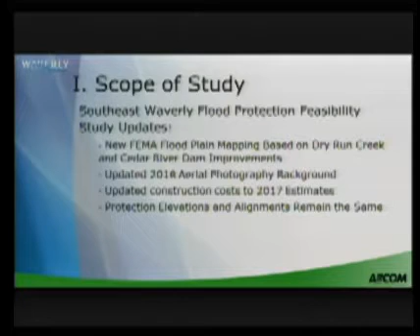So as Mike had said, we took the original study and updated it with the new floodplain mapping that was created based on the Dry Run Creek improvements that have been completed over the last couple of years, as well as the Cedar River Dam. Along with that, there was some updated mapping done based on topography downstream of the dam, which removed some areas from the floodplain and updated the floodplain based on the current layout of the land. So we wanted to update those figures, and that's what I'll discuss today.

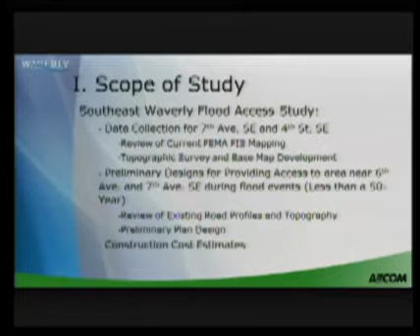As well as updating those figures, we put together a preliminary design for keeping access during these smaller flood events either through 7th Avenue Southeast or 4th Street Southeast. We gathered some information through a preliminary survey to get the existing elevations out there and reviewed those based on the new flood mapping to see what options we would have for potential road construction in that area. So just a refresher, the Cedar River mapping changed based off the dam improvements and the Dry Run Creek improvements.

And with those improvements, we also reviewed the protection levels that we had designed for in the 2011 study. The dam improvements were basically for upstream improvements. They didn't really affect the downstream flood elevations on the Cedar River. So what we had originally intended in 2011 protection levels, those are still current today. They match the current flood elevation levels that are out there, even though the mapping has been updated a little bit in that area based on topography.

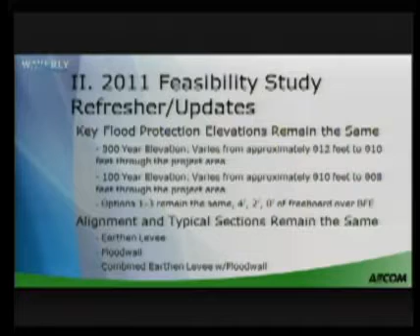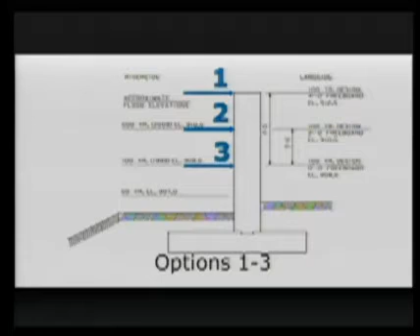The current flood elevations, the current alignments that were in that 2011 study are the same as they are today. We're looking at the same typical sections, which are earthen levees, either a flood wall or a combined earthen levee flood wall, where we have limiting right-of-way in areas like that. Just to go over again, we had the 3 protection levels that we looked at, which is the 4-foot of freeboard over the 100-year, the 2-foot of freeboard, and then option 3, which is essentially no freeboard over the 100-year elevation.

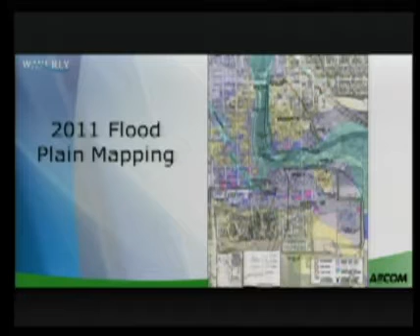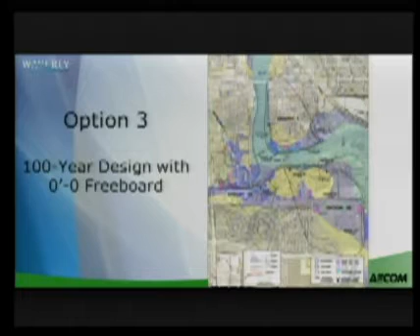So as part of the update, we also looked at bringing the cost from 2011 to 2017 dollars. And if we look at the comparison, on average, it was about a 40 to 50% increase from 2011 to 2017. This is just based on average prices that contractors have been bidding projects for since then, personal experience for those projects. So it's a significant increase from 2011 to 2017.

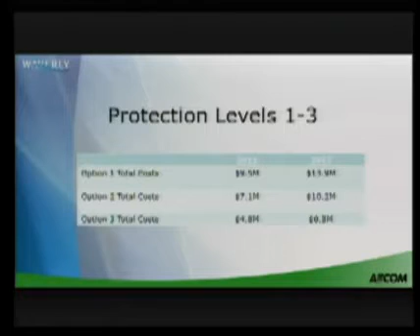Just to run through it, option one, which is the more robust option, is around $14 million, the planning level cost estimate for that flood protection option. If we go down to option three, we're looking at about $6.8 million. But again, that's a lot less protection for that option. So those are the updates that we completed on the 2011 study. As Mike had said, it's mainly dealing with the new floodplain mapping that the city has worked on between the projects in the area, as well as aerial mapping and then the new cost estimates.

One of the other options we looked at is access during these flooding events. We talked to the city, and the city has made us aware that some of these areas have a hard time accessing their properties during not necessarily the 100-year flood event, but even some of the smaller events, say a 10-year flood event or up to a 50-year flood event. And a lot of these access points are 7th Avenue Southeast and 4th Street Southeast.

So we looked at a preliminary design in those areas to see what we could do to provide access for these smaller flood events. As I mentioned, we're looking at a 50-year and less flood event. We're not necessarily looking at a 100-year flood event because that's a lot harder to access, and some of these areas are inundated during those events. The design is just based on existing profiles and a review of the FEMA floodplain mapping. The goal is to provide access for these smaller events and not leave any of the community cut off during those events.

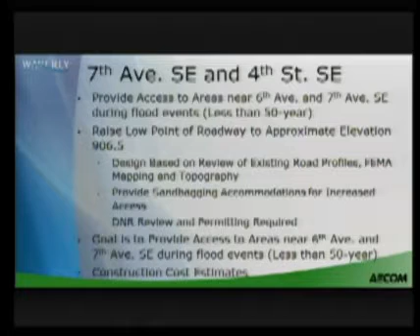This is kind of a layout of what we're looking at. In the northwest portion of the area is kind of where 7th Avenue Southeast is, and we'd be looking at raising that roadway. Currently, the sump area, the low area of that roadway, is around 904. We'd be looking at raising that up to around 906.5, which would be about a 2.5 feet rise.

By doing this, it would allow access for some of these smaller events. We'd also be looking at providing an area where if we got an event where the water surface is going to be above this 906.5, we could add a couple feet of sandbags north of the 7th Avenue Southeast intersection to increase the amount of time that we'd have access for larger events, up to approximately a 50-year event.

Now, we're also looking at a preliminary design of raising 4th Street Southeast as well. In this area, the flood elevation is approximately 2 feet lower during an event than it is in the 7th Avenue area. But we're still looking at raising this to about the same elevation. We just wouldn't require the sandbagging down in that area.

These are some recent floods, and then the 50-year elevations. If you look at the 50-year at top, the 50-year flow based on the FIS is around 34,000 cubic feet per second. That equates to roughly elevation 908.1 at the 7th Avenue Southeast intersection, the low point of the roadway.

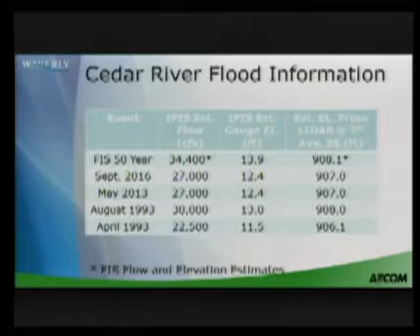And then you look at the August 1993 flood, that was around 908, and in April 93, that was around 906.1. So all of these recent crests would have put 2+ feet of water in that low area of 7th Avenue Southeast, cutting off access during those events. This is just more of a graphical representation of those events.

So this is elevation 907, based on the Cedar River flooding, the contours of the area and LiDAR mapping. You can see in the blue area up at 7th Avenue Southeast where it's overtopping the roadway for the elevation 907.

With our improvements, we'd be looking at raising that roadway to 906.5, but also allowing an area for sandbagging. So if it goes above that 906.5, we could put a couple feet of sandbags up there to still provide access to these high areas that you can see outside of the blue shaded area.

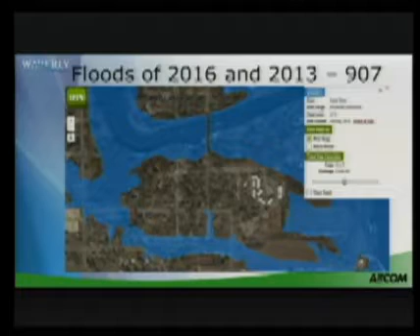This is just a follow-up of a smaller event where, if we went with the 906.5, we wouldn't necessarily need to have sandbags out there, and we'd still be able to access those areas during the smaller flooding events.

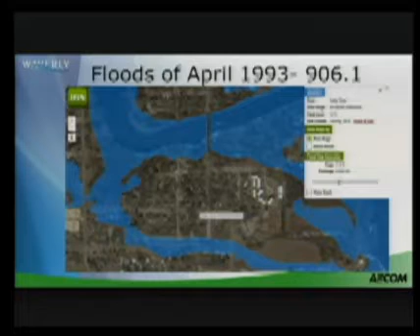This is the preliminary layout that we'd be looking at for the 7th Avenue area. We'd be looking at replacing about 600 feet of the paving to eliminate that low spot, that sump that's there now, and move it down closer to the First Street Southwest intersection. By doing this, we'd have a constant grade, so we'd put a couple new storm sewer intakes in.

We'd have some rebuilding of the sidewalk on the south side of the road, as well as a gate well structure that we could close during these flood events to still provide road access to these properties.

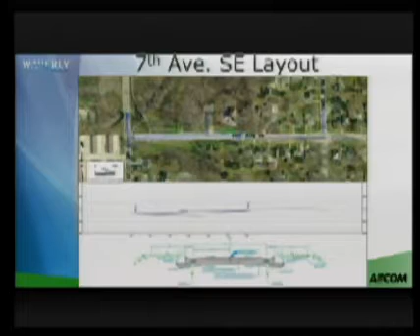4th Street would be a similar design. However, it's a steeper grade going in and out of the low point of 4th Street, so we would have less roadway to reconstruct in this area, just over 300 feet of roadway, and we'd still be looking at some additional storm sewer improvements as well as a gate well in this area.

Another option we added to this area would be connecting the 10-foot trail that is just south of the school to the existing roadway.

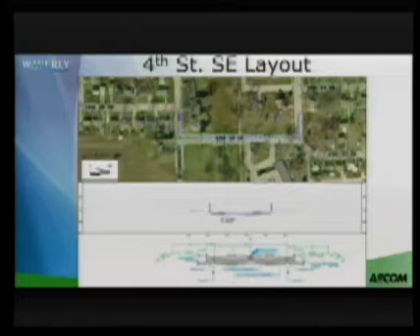Now we'll kind of look at the costs associated with each of these options. As I mentioned, 7th Avenue was approximately 600 feet of roadway. We'd be looking at about 330 feet of storm sewer, a couple storm sewer structures, raising the roadway, so you've got some earthwork construction in there, removal. It would be around $420,000 as our planning level cost estimate for that 600 feet of roadway and storm sewer improvements.

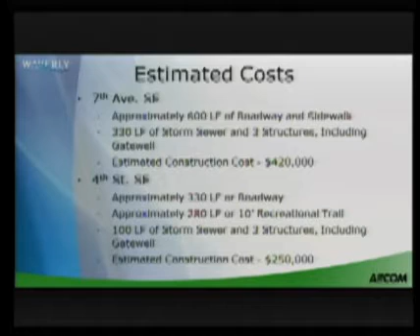And then 4th Street Southeast, like I said, we're about half the amount of roadway reconstruction, a little over 300 feet, 330 feet. We'd still have some storm sewer and about 280 feet of the recreational trail. Our planning level cost estimate for that option is around $250,000. So at this time, I'd like to open it up for any questions regarding the update to the flood study, as well as a review of preliminary design for access during these smaller flood events.

So if you close off 7th Avenue, that's flowing water during a flood event, correct? Yes, during a flood event, it's outside of the floodway, so it's not the floodway flowing water. It's in the floodplain, but water always finds kind of the low spot, so there is some flow that would come across that area. Right. So that flow goes across 7th Avenue. Yes. Yeah, if you block that off effectively to protect that downstream, what is that going to do to your level on the main part of the river?

Preliminary analysis. Now, when we go into final design, we would do some more detailed modeling of this. But given that it's outside of the floodway, which is kind of the reserved area that no fill is supposed to take place in, we're in the floodplain here. There should be minimal, if any, impacts to the upstream elevations, especially in the 100-year event, because what we're looking at is protecting up to like a 50-year event. So during a 100-year event, there's still going to be flow going over that roadway. That flow is still going to be there.

But since this fill that we're looking at is just confined to the roadway and in the floodplain area, not the floodway, the floodplain area is not the effective flow area per se, especially with the fill that's downstream of that area. Mike, with your experience seeing the water flowing across, do you concur with that? Yeah, as Dan indicated, when water does go over 7th Avenue, it's only a couple feet deep, while in the Cedar River, it may be 20 feet deep. So it's not insignificant, but it doesn't have a substantial impact.

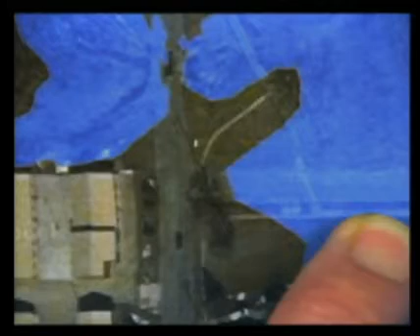So when we talk about sandbagging the north leg of the intersection, we would sandbag from like the corner of Ramker mini storage across the roadway. That's the extent of our sandbagging. So upwards of maybe 2 feet high for 50 to 70 feet in length is what we're talking about. And in doing so, we keep the water from going into Crestwood Park, and we maintain access into this part of town. So that was April of 93. We get to August 93.

It's now more substantial, but even with this one here, there's been some additions here at Ramker Mini Storage, and we now have the pedestrian bridge across Dry Run Creek. Sandbagging across would also provide protection from the August 1993 flood. You would be able to access it from the south and come up on 7th Avenue Southeast and access the neighborhood that way.

Then we get into the floods of May of 2013 and September of '16. They were very similar. This is showing the high water in Harlington Place cul-de-sac, and it was taken shortly after the water started to recede, but you can now pick out the debris line, so we know how high the water got.

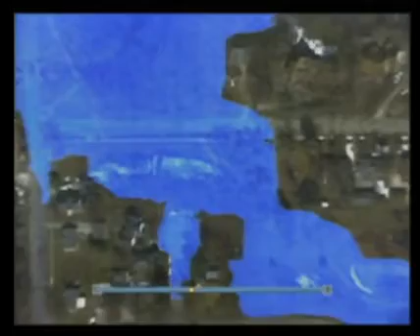Iowa Flood Center mapping. Again, we can correlate the elevations. Here's Harlington Place cul-de-sac, so we know this is a good representation. And then here being able to sandbag across over to the sidewalk on the northeast corner. Again, preventing the water from crossing 7th Avenue and maintaining access from the south and using 7th Avenue into the neighborhood.

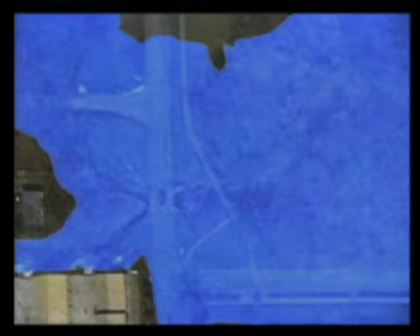How much available freeboard would you have before it would go into Ramker at that point? Ramker is, I think most of it is within 6 to 12 inches of the 100-year flood elevation. You see that straight line where that Dry Run that goes by the bowling alley comes out. At that point, I'm just curious how high between the water level and the level of the Ramker mini storage. 2 foot, 3 foot? So the 100-year cuts through the mini storage units. At that point where it transitions from purple to yellow, it's 0 depth, and by the time you move to the northeast corner, I'm thinking it's maybe a foot and a half deep.

So they're finishing up the report. It's good documentation. There's no action required tonight. Just want you to think about it, and if you come up with questions as we move into strategic planning and budgeting, we think that this is a project that warrants further consideration and discussion. When looking at the FEMA level flood improvements, $14 million, and there's maybe 30 homes that would benefit from that. So that's not going to have a favorable benefit cost.

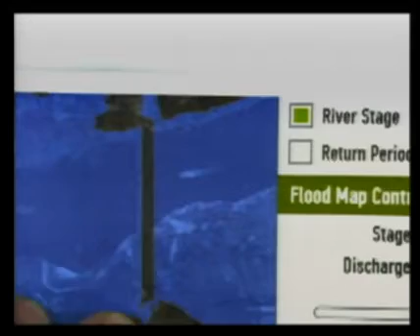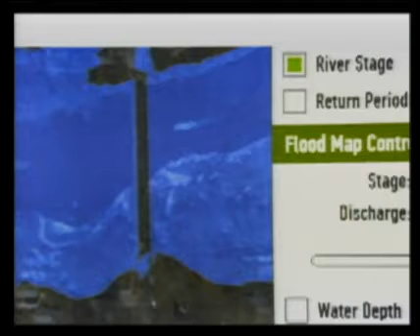So if there's a vehicle bridge there, this is again representing that August 1993 flood, which is right at a 50-year flood event. This is showing the existing truss bridge with a new vehicle bridge. These little areas on the north and south side go away because of the bridge approaches, an elevation change. So you would not need this. Which flood is this then? This is August of '93, which is representative of a 50-year flood event.

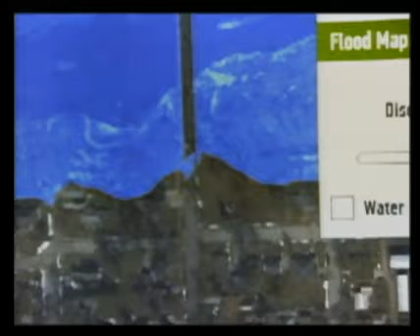Okay, now I'm going to switch back to the presentation, and this shows the purple is the 100-year flood. You can see that with Ramker, it's going to be very close. If the water's only a few inches deep at a 100-year flood, so if it's a 90-year flood, you probably still have vehicle access for certain vehicles. But that gets to be a tough decision then. At what point do you, in effect, close the neighborhood off and either mandate evacuation or encourage evacuations?

Because, you know, are you going to go a little bit higher? When is the crest coming? Is it coming at night? Those are all the tough, challenging decisions. So if I'm following correctly, then, well, what would you say?

Okay, so for a 100-year flood, or a 50-year flood for that matter, with a vehicular bridge, what would be the optimal thing to do with 7th Street? Leave it alone. I mean 7th Avenue? Yeah, leave it alone, okay. So we wouldn't have to do anything there if you have a new vehicle bridge at 3rd Street. Okay.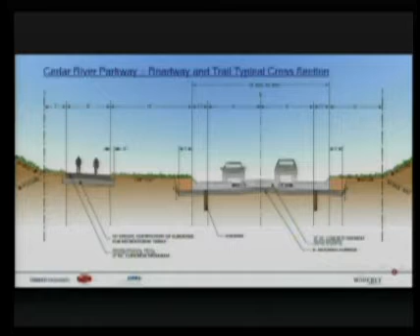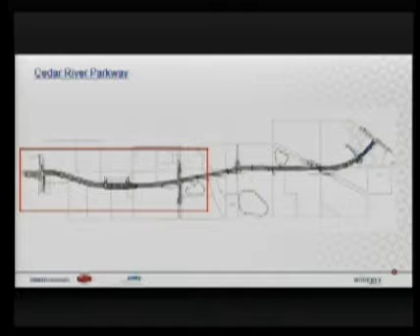And Casey will talk a little bit more about the bridge in a minute. You can see here the entire corridor just to show you kind of what's been built so far. That's the piece that's in the box there. That's what's in place right now, almost up to the river. And then what we'll be building will start there from the berm that was started in the first project, and then across the river, and then over to Highway 3.

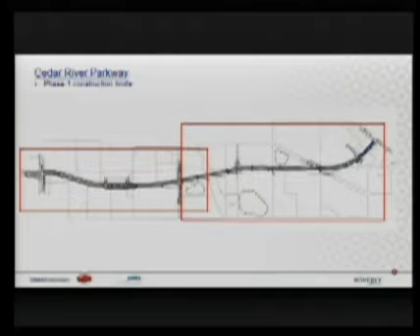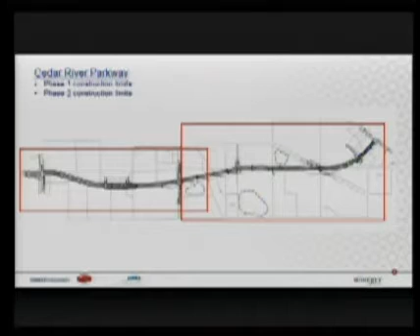So just to clarify, on the cross-section that you're showing, what we put in so far on the parkway has the kind of boulevard in the middle. Right. This is not going to have it then beyond? That's correct. Yeah, no boulevard on this section. Yep. Just a 2-lane road. Okay, so Casey's going to talk a little bit about the bridge and where we sit now.

Thanks, Jeff. So as Jeff mentioned, we've got plans into the city for their review, and we've been coordinating between ourselves and Stanley to make sure everything ties in nicely. But just a couple of things that I want to hit on the bridge. The first thing there that's kind of circled in red is at the piers, right as we cross the river, we ran into some interesting conditions with rock elevations really up and down, and so it kind of threw some of our design out the window, and we had to coordinate with Braun Intertech, who is not here tonight, but provided great advice as far as how we were tying into that rock and what's quality and all that kind of stuff. So that was some of the construction challenges that we had to deal with as we were designing the piers.

The next item you see here is mostly about what's on this bridge from an enhancement standpoint. So those circles there are the light blisters. We'll show them in a little bit closer view coming up here, but we coordinated with Waverly Power and Light to make sure that we were providing the right lighting for their typical designs, and worked with their engineers to get that all coordinated. We've got a pretty long bridge. It's actually split into 2 units, and so the 2 sheets, this is the second bridge, each 3 spans, so 6 spans total. The second bridge, we ran into the same kind of construction issue with elevations. All that's been mitigated, but without the knowledge in advance of where the rock was going to be, we didn't know what our footings were going to be like, and so that was one of the biggest unknowns that we entered design with, but through coordination with Braun and with Stanley, we have great solutions there.

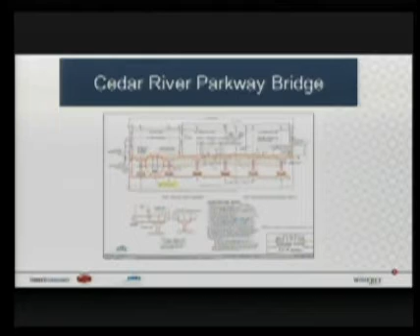The different barriers we'll talk about real closely in a minute, but including form liner and rails for safety, as well as providing maximum visibility. And the other item we wanted to point out, just working with Waverly Utilities, they're thinking ahead about needs that they have getting conduit and everything across the bridge. So we're providing additional conduit suspended from underneath the deck to make sure that all their needs are met.

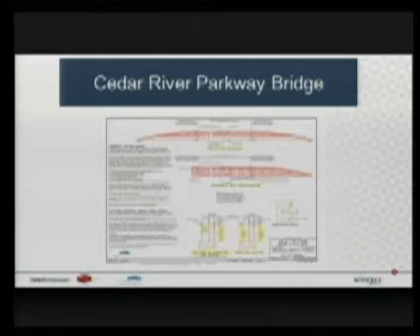It's a limestone type look, and you can see close up, if you've got the presentation in front of you, the heights of the different rail sections. So exteriors, trail faces are full height. Road faces, because they get some of that snow pile and salt, we don't have those full height. They're just the top half. That's textured and colored. Again, an exterior view, full height coloring and texturing.

The light poles, just a reminder, we're using mast arms instead of these decorative ones. Final look at this blister, you can kind of see it sticking out there. We're texturing around that so it'll be seamless in the visibility from outside. You'll see texturing and coloring all the way around that light pole stand as well.

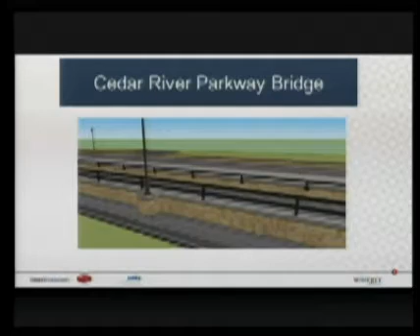This provides the necessary requirements for safety, but it also increases visibility. And so those enhancements are a really good option moving forward. It also reduces cost because primarily we're still a DOT standard rail just with some small modifications instead of using something that took us a lot longer to design, which is more expensive, and is non-standard for fabrication, which is more expensive. So I think that our results will be real good there as well.

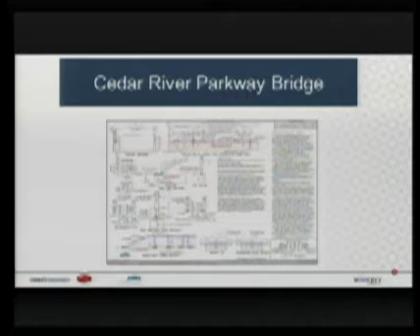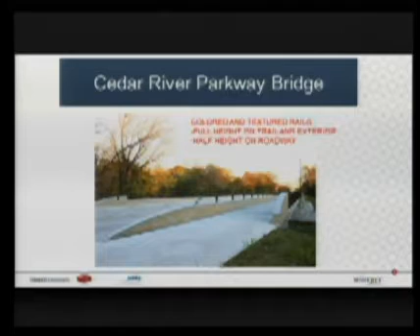We wanted to highlight just some pictures of some projects that we've used very similar form liners and coloring on. So this is a project that we did in Ames. You can see the coloring is the same kind of a deal, the texturing, that on the trail and exterior sides we're full height, and on the roadway side, if you can kind of see in there close, we're half height on the top side. So it's a very similar layout there.

Up close a little bit, you can see the color variation actually in our specifications and our notes. It's actually a 3-tone sealer color that they do all by hand, and it takes some time, but the results are really great. It looks very realistic in its final application. And this bridge is a couple years old now and looks really good maintenance-wise as well. So turn things back over to Jeff.

All right, thanks, Casey. A couple of other design elements we wanted to cover today. You're seeing the plan and profile of the underpass for the trail, the Waverly Rail Trail. What we did was we designed the road to go over top of the trail and put in a 12 by 12 box, basically a box culvert with flared ends for the entries for the trail.

You can see in the profile view there, we're basically matching existing grade through there. We did have to realign the trail to go through this culvert since it's skewed to the existing trail.

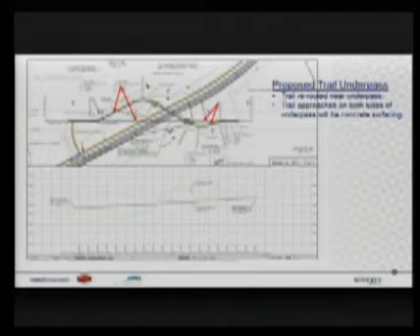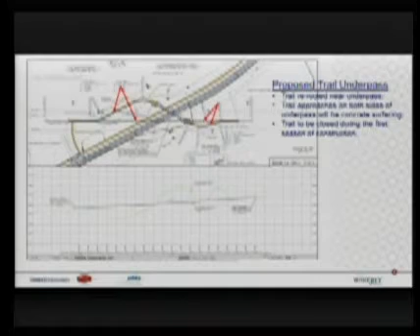So the proposed trail is going to be concrete, just to let you know. The surfacing is the same as the road and the parallel trail up top. And the trail will unfortunately be closed for a while during construction. We felt that this was the best approach in this area rather than to try and reroute traffic through this area while there's construction going on. We felt this was the best option.

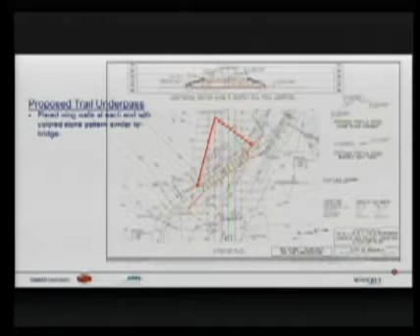So just a couple of other features about the trail. You can see those flared entries. Those will have the same architectural treatment as Casey was showing on the bridge. So those will match. Those will have the limestone look as well. And also on top of those walls there will be fencing, I think similar to what was put in for the Dry Run Creek project on those culverts. It's the black-clad chain link fence.

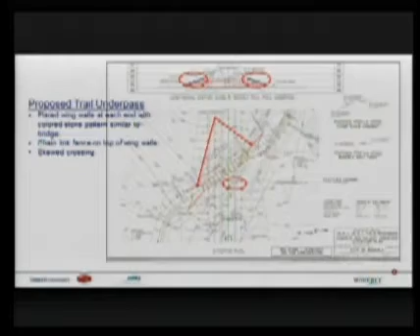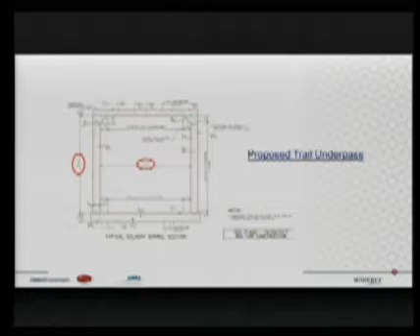And then just wanted to highlight the skew. It's a 35-degree skew for this culvert crossing the road. You can see the cross section of the culvert there. It's a 12 by 12 culvert, which gives you some good clearance there on either side. Typically, the trail is 10 feet wide, 8 to 10. A lot of trails are 8 to 10 feet wide. This is a 12-foot culvert, so it'll give some nice clearance on both sides for two-way traffic.

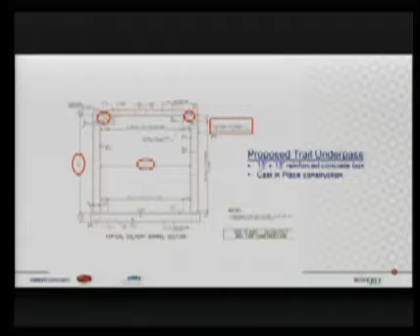We also provided provisions for future lighting. We're not going to put lighting into the culvert for this project, but we'll have conduit in there, and we'll have places where you can mount light fixtures in the future if the city decides to do that. We did a couple of renderings of what it might look like when this is all built.

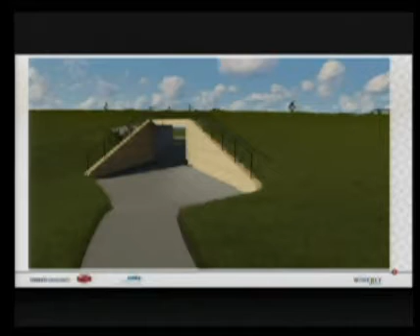The other thing I wanted to talk a little bit about is stormwater management. As you know, a lot of this road is being built up, which requires a fair amount of fill. We decided to try and get our fill from on site. So we have two borrow sites on this project. I'm calling them the North Basin and the South Basin. So we were able to get all the fill that we need for the project on site here by using these borrow pits. And then these borrow pits will also double up as stormwater management features. They'll be sedimentation basins as well as retention basins.

So you can see on this drawing kind of the flow of the water. Roadside drainage and road drainage would go into intakes in the curb, and then be carried west through the storm sewer, across past where the underpass is, and then it will outlet into the North Basin there. That'll be the first treatment location.

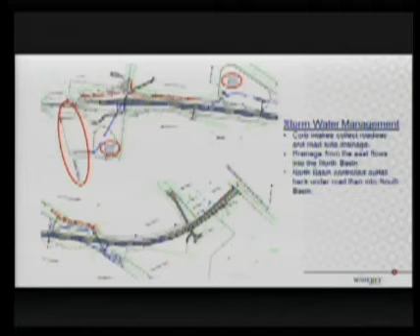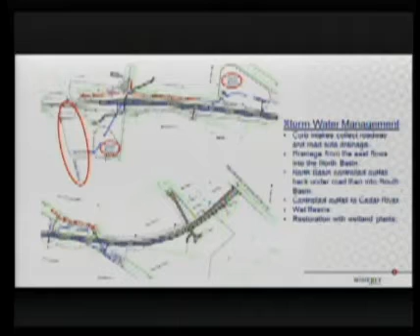Both of these basins are projected to be wet most of the time, because of the elevations and the depth of the cut of the borrow that we need to have. There will probably be water in these basins most of the time. So we've got some illustrations that will show what that might look like. The other thing we're looking at is wetland plantings around the edges and a little bit into the water on these basins for part of the restoration.

This is a cross-section of the North Basin. You can see it's got undulation. There's a deep section, and then a couple of shallower shelves where we could do some shallow water plantings, some wetland emergent plantings, and then some upland plantings on the slopes.

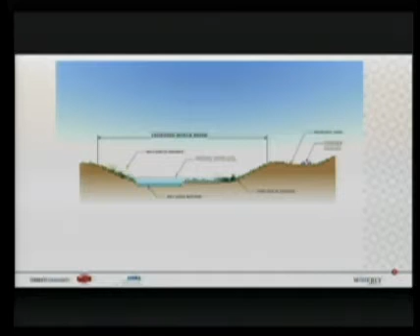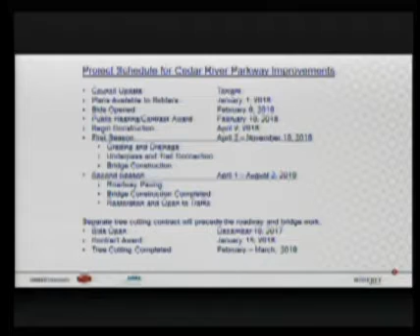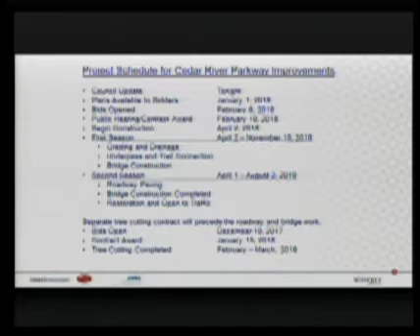Okay, just a little bit about the schedule. We're planning to finalize this design in early December and get it out for bids for a bid opening in early February, which would be followed by a public hearing mid-February. We're hoping to begin construction early April. As Mike said, it'll be 2 seasons of construction.

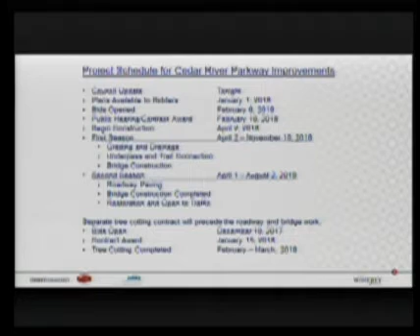First season, we expect to do drainage work, most of the bridge work, the underpass and the trail connection. And then the second season, we'd finish up the bridge, do the paving for the road, and then open it to traffic after restoration. There is one other early construction that needs to happen.

Do you want me to? Yeah. Mike's coming over. Okay. Visual here. Oh, okay.

So we found out through our permitting process that we are in the zone of the northern long-eared bat, which means we can't cut trees after April 1st. And since the main project will start after that point, we need to have an early tree cutting project that happens prior to the main project. So we're looking at bidding that in December, having it awarded in January, and then having the trees all cut before the end of March.

The Corps of Engineers finally found a bat that covers half the United States. I think previously it was the Indiana bat? Yeah. And so there's a pretty extensive range for this requirement. It goes all the way up through Minnesota. And even though our Corps permit is just for the river crossing, it applies to the entire length of the project. Correct. We have between 8 and 9 acres of woodland that we're going to be clearing for this project.

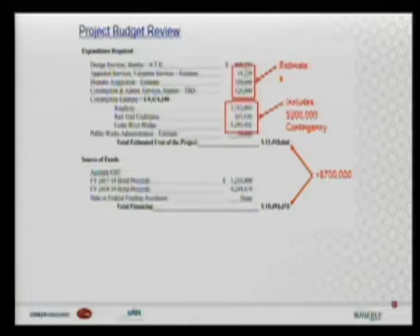There's still $200,000 of contingency that we're holding with our construction estimate. We may not need all of that, so that could help bring the cost down a bit. And there are several other items that are still estimates, the biggest one being the construction services, construction administration estimate. So we're still looking at what that will be. You usually go by the low bids. For construction, we probably come in with a low bid, and we might save a little. Yeah, that's at the end of my slide here.

I just wanted to point out what we did back in 2014 when we bid the phase 1 work. Our original estimate was about $3.6 million before construction. The bid cost was just slightly under $3 million, and final cost at the end of construction was a little bit less than 2.9. So we did save quite a bit on that project after the bids. This will be a very similar bidding time period, so it's possible that we can get favorable bids and save some money there as well. Okay.

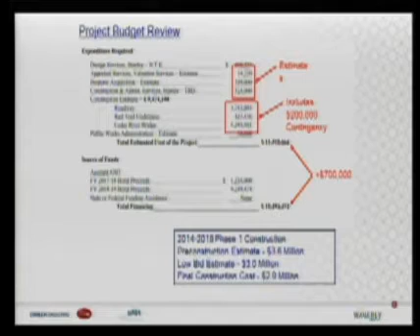How long would the rail trail be projected to be closed? Would it be closed the entire season or just for a couple months? What we'll be shooting for is to have that trail back open possibly by Labor Day in the first season. But it's possible that it will be closed the entire first season, depending on the staging that the contractor chooses to do his work.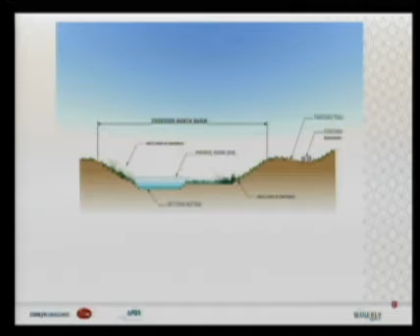Thank you. And you said the trail would be concrete? Yes, ma'am. The trail, both the parallel trail next to the road and the connection to the underpass, will all be concrete. And why? Why concrete? Well, the roadway's concrete, trail concrete. When starting new like this, it's cost effective to keep it as one material, and concrete would have the best life cycle cost, the best value.

Okay. It's interesting you ask about concrete because I live in Des Moines and we have lots of trails there. They tend to replace the asphalt trails with concrete when they upgrade, because the asphalt trails get roots growing through them and they become kind of rough, particularly for cyclists. So they tend to replace them with concrete when they go bad.

I've got a couple things I want to point out. So Casey, you said this is a 6-span bridge. How many of those spans actually cross the river? Basically, just one is across the river under normal flows. If you go a ways back in your packet, you can see that. But a substantial portion of this is covering the approach and the floodplain. Most of the construction should hopefully occur on dry land if done at a favorable time of the year.

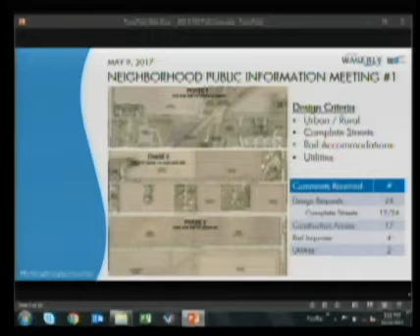After that, 17 of the comments were construction requests, keeping dust control down, what's going to be the access to my house when this is under construction, followed by 4 rail questions and a couple of utility questions were the official comments that we received.

So after looking at those comments, we kind of went back to the drawing board and drew up some stuff. Went back and forth on some design iterations. We were kind of tasked with looking at speed limits, design speeds of this roadway out here, what could happen. And so the iterations that I'm talking about is we played with the speed limits and the curves, design criteria that we're tasked with as engineers, how to relate that back to whether or not we have good earthwork.

A lot of this corridor is extremely flat, so we also have to take into consideration drainage concerns. If we go curb and gutter, where are we going to be routing the stormwater? How are we going to be routing the stormwater? A large percentage of this project area is not developed yet, so we might be routing it into farmland. So those are all design considerations that we looked at.

After looking at those design considerations, it was pretty outstanding that the 40-mile-an-hour design speed / 35-mile-an-hour posted speed limit kind of met a majority of our design criteria, which also kind of meets what this roadway function classification is potentially going to be in the future for the city as a major collector. Those were kind of the design criteria that we matched around for the roadway part.

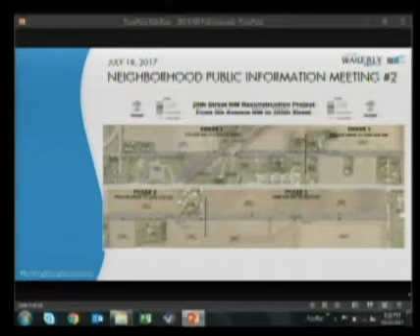As you can see, we connect to the trail, like I discussed before, and the connection between Phase 1 and Phase 2 really worked out well. If there is a considerable time gap, you could build Phase 1 and transition smoothly into Phase 2 existing pavement.

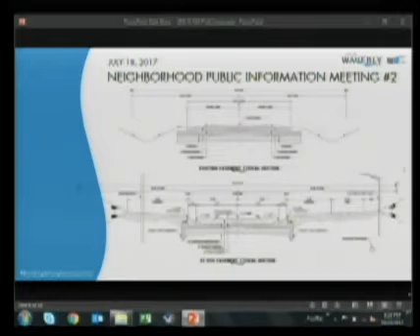So, like I said, we presented a curb and gutter section at the second meeting. Up above is what's out there existing. It's a 66-foot right-of-way, open ditch, 2-lane roadway. What we are proposing is to make it a 100-foot right-of-way, and that would supply adequate space to put future utilities in, and also supply a sidewalk and trail and lighting. So one thing that would need to take place is the purchase of additional right-of-way, which we get into on this next slide.

On Phase 1, there's potentially a little over 4 acres of acquisition for right-of-way, and just under 2 acres of temporary easement. 10 homeowners would be affected in Phase 1. For Phase 2, again, a little over 5 acres. We didn't look at temporary easement for Phase 2 because Phase 2 and Phase 3 are too far out in the future, but on Phase 3, there's only 2 homeowners because that's where we get into the undeveloped land and just farm owners on either side of the street.

Now, to go back, the most important part of this project that we're focusing on is rail coordination. Like I stated, there are 2 crossings on 20th Street Northwest. As a part of this project, we are also tasked with looking at 5th Avenue, putting sidewalk and narrowing the roadway in that location as well. With rail, we are coordinating with the Canadian National Railway and the Iowa DOT. The city entered into an agreement with them back in June of this year to do signal work on 20th Street Northwest.

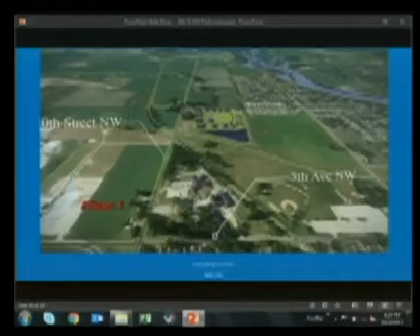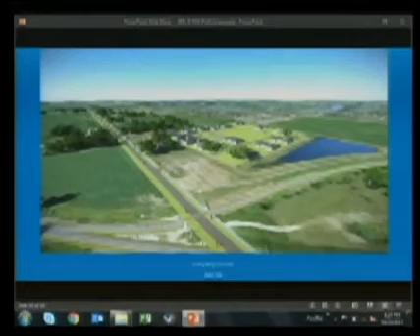We do have a video that we put together just for a visualization to help everyone visualize what the potential for this area could be. So as we're flying into the area, we've got Phase 1 starting at 5th Avenue, and we're narrowing in here to the railroads. And like I said, there's your main line and your spur. What CN plans to do is put 4 arms there, so each crossing has a northbound and southbound arm.

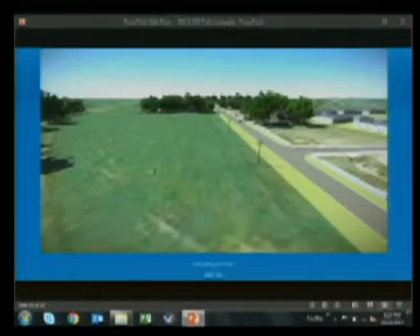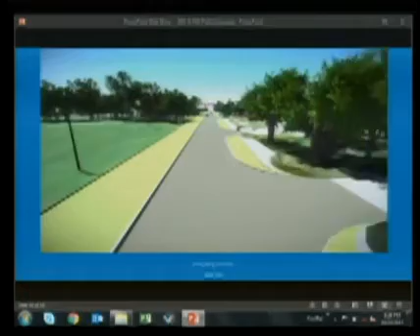Right there, we're coming to the main Eisenach Village entrance. One of the main concerns with the residents out there is the returns. We need to make the returns wider so delivery trucks don't break their curb and create ruts out there. As we proceed through the corridor, you'll come up here. This is where we show that temporary access, option 1, that we are recommending if we proceed forward with this. And then we get to the end of Phase 1 and enter into Phase 2 there.

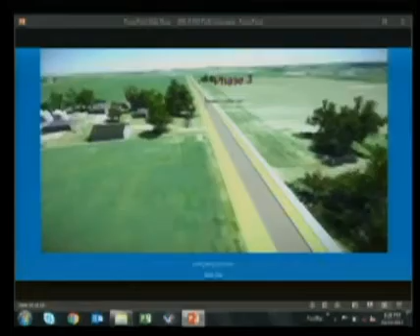Very same structure, 100-foot right-of-way, 2-lane road with the trail on the east side of the roadway. And it pretty much remains this way through the entire corridor. We'll get to the end of Phase 2 here, and we'll back out, and we'll do a little wide span aerial view so you can really see what the limits of phase 1, 2, and 3 are in conjunction with the area out here. And with that, I can hopefully answer any questions that you have.

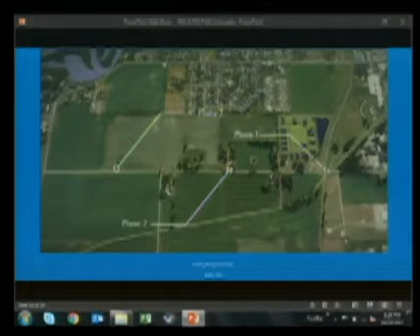Your cost estimates, you referenced water main stability enhancements out there. Does that include any water main work? Yes, yep. In phase 1 with the 2.2 estimate, that does include the water main. Other questions?

Well, he cleaned up the video because he took the neat stuff out. They had the drone going underneath a car and causing an accident. So I told him he ought to leave it.

So I think that it's interesting to see how technology is advancing so that we're actually able to visually drive or fly the corridor and overlay aerials and see how the farmsteads and the adjacent features are going to be impacted or benefited from a project like this.

What I do want to talk about is when we started this project, we had a budget number in mind of about $1.5 million, and as Ryan has shown, once we got into the design and really identified the challenges and the issues and the concerns along the corridor from a design build standpoint, that cost estimate started to go up. Now, if you go to my agenda memo, it does include the crossing gates and signals because from a budget standpoint, they've been combined into one project account. So I wanted to show everything that is being identified in that project account, which is the railroad improvements with the signals and the gates, plus any roadway reconstruction we do.

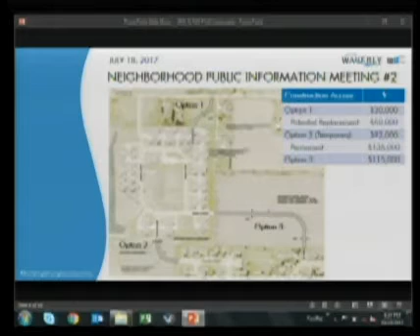That would be not combined, that's separate. So if we've got to replace, we're dealing with 80? Okay. That'd be correct. Correct, yeah. Okay. Connecting to Jadestone involves a third party. That would be Wartburg. And it's not readily available at this time. We were hopeful that maybe it would be available or would meet our timeline, but even if we had all the financing in place, we no longer feel that we can get a permanent roadway built before the reconstruction on 20th Street would start.

Okay. So the railroad, if we do like a Phase 1 Part A that only involves the railroad, then there's no temporary drives that need to be built. They would have to go around to the north and come back in on 12th Street, but we would not be building any temporary drives to complete the railroad work.

And then, did someone mention that potentially for all three phases, we're talking about 10 homes that could be affected? For phase one, there were, I think, 10 property owners that have some acquisition. For right of way. Okay. No structures? No. Just, yeah, okay. So property acquisition in terms of right-of-way access. Right. The existing roadway corridor is 66 feet wide, and so we're looking at an additional 17 feet on the west and east. Okay. Thanks.

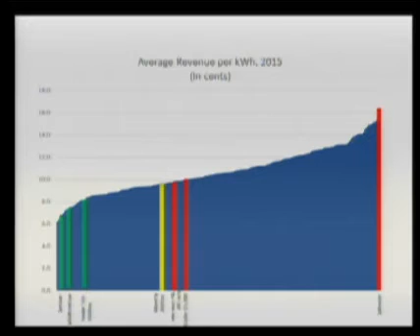I think it's a fair question to say, why is Denison the lowest? And there's really a simple answer. Denison receives up to 60% of their wholesale power from the hydro dams on the Missouri River. It's known as a WAPA allocation. So basically, if your town is in the watershed that leads to the Missouri River, you're given a WAPA allocation. That's less than 3 cent power on the wholesale level. So that contributes to why they're the lowest in the state. Now, you can only get this if your watershed flows into the Missouri. Waverly does not. But I think it's important to note when we're trying to compare apples to apples, why is Denison lower?

So, where are we compared to all of the WAPA allocation utilities in the state of Iowa? This chart shows where we stand. We don't get WAPA, but that's where we stand. All the rest of them are WAPA allocated utilities. If you look at that long list of utilities that's in the packet, anything with a blue line on it was a WAPA allocation.

That brings up an if question: if Waverly did get a WAPA allocation, where would you rank in the state? Well, our revenue requirements would drop to 7.65 cents per kilowatt hour, and we would rank the 8th lowest in the state. So WAPA allocation has a dramatic impact on your rate structure. So that's where we would be. But that's a moot point. We're not going to get WAPA.

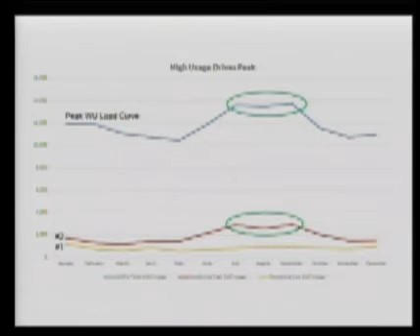You can see home number one on the bottom has flattened it out. So it does pay to reduce our peak. Anything we can get off of that peak saves everybody money. So energy efficiency and conservation will help everybody save money in Waverly on their electric bill.

So what are our rates going to do in 2018? Well, we're happy to say that there's no rate increase scheduled for 2018. I think with the cost-saving efforts we've done in-house, we've stopped this annual increase in energy rates. So that's where we stand today. With that, do you want to take any questions?

That's quite a presentation. Thank you. Go ahead. Daryl, as you know, I've researched both Waverly Light and Power and the surrounding areas, different utility companies. Had a real good conversation with a gentleman on the utility board in Independence, MidAmerican Energy, some of their higher up management people. I guess my questions are, and I did some research on my own as far as rates. Are you familiar with electricitylocal.com? Never heard of it.

It's pretty intuitive, and they list as references the National Renewable Energy Lab, the U.S. Department of Energy, U.S. Energy Information Administration, and the U.S. Census Bureau. And you seem to always want to ball these rates up into one average for the entire community, and I think you need to break that out. And if you look at that, according to this website, Waverly is at 12.36 cents, which is right about where you're saying 13.6. Waterloo's paying 8.3, and this is residential rates. Cedar Falls 9.6, Denver 8.83. These are all MidAmerican rates again.